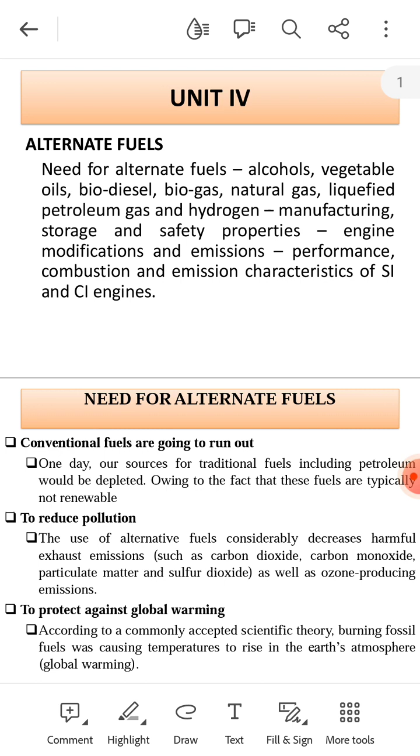To protect against global warming - according to commonly accepted scientific theory, burning fossil fuels causes temperature to rise in the earth's atmosphere, that is global warming.

To save money, alternative fuels can be less expensive to use, not just in terms of the fuel itself but also in terms of longer service life. This in turn means savings for the long term.

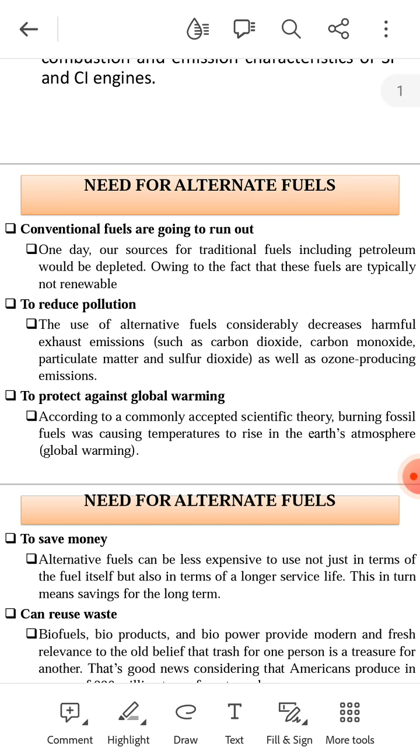Can reuse waste. Biofuels, bioproducts, and biopower provide modern and fresh relevance to the old belief that trash for one person is a treasure for another. That's good news, considering that Americans produce in excess of 236 million tons of waste each year.

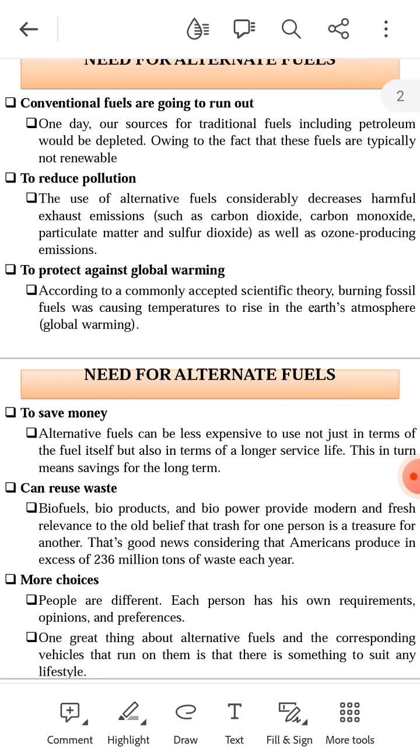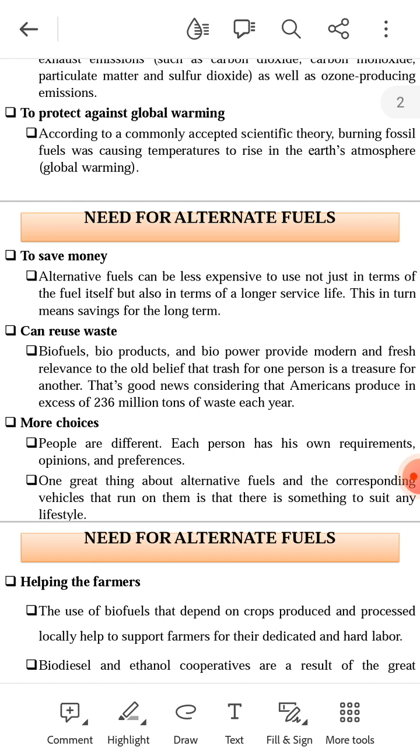More choice. People are different. Each person has his own requirements, opinions, and preferences. One great thing about alternative fuels and the corresponding vehicles that run on them is that there is something to suit any lifestyle.

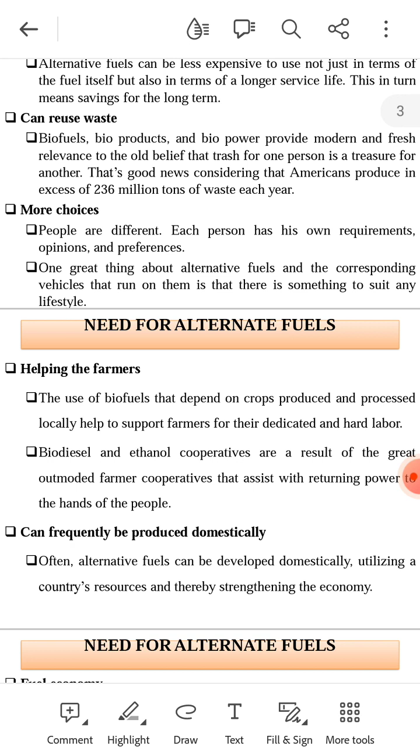Helping the farmers. The use of biofuels that depend on crops produced and processed locally helps to support farmers for their dedicated and hard labor. Biodiesel and ethanol cooperatives are the result of great, outmoded farmer cooperatives that assist with returning power in the hands of the people, and can frequently be produced domestically.

Often, alternative fuels can be developed domestically, utilizing the country's resources and thereby strengthening the economy. Fuel economy - vehicles driven on hydrogen fuel cells and diesel are more economical with respect to fuel compared to equivalent gasoline vehicles, meeting current global energy demand.

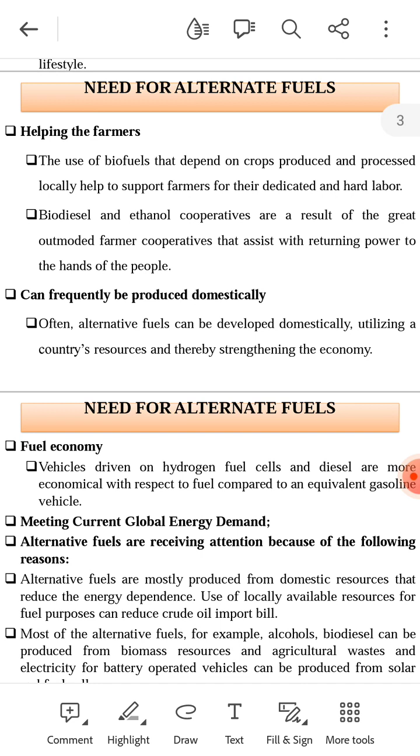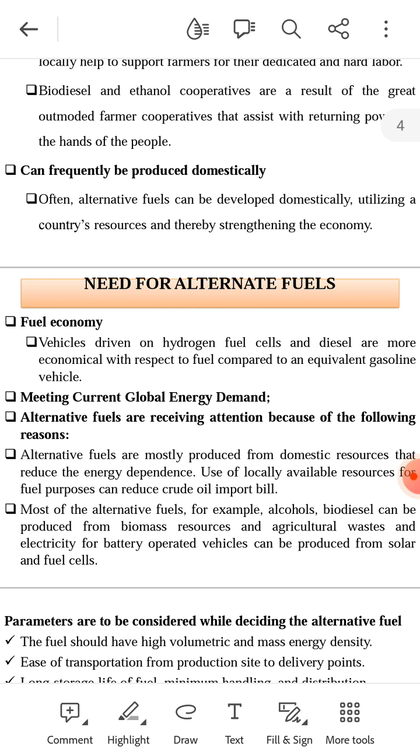Alternative fuels are receiving attention because of the following reasons. Alternative fuels are mostly produced from domestic resources that reduce energy dependence. Use of locally available resources for fuel purposes can reduce crude oil import bills. Most alternative fuels, for example alcohol and biodiesel, can be produced from biomass resources and agricultural waste, and the electricity for battery operated vehicles can be produced from solar and fuel cells.

Parameters to be considered while deciding alternative fuels: the fuel should have high volumetric and mass energy densities, ease of transportation from production site to delivery points, long storage life of the fuel, and minimum handling and distribution problems.

Environmental compatibility - while using alternative fuel, the engine performance is expected to improve significantly with regard to regulated emissions and unregulated emissions. Manufacturer warranty.

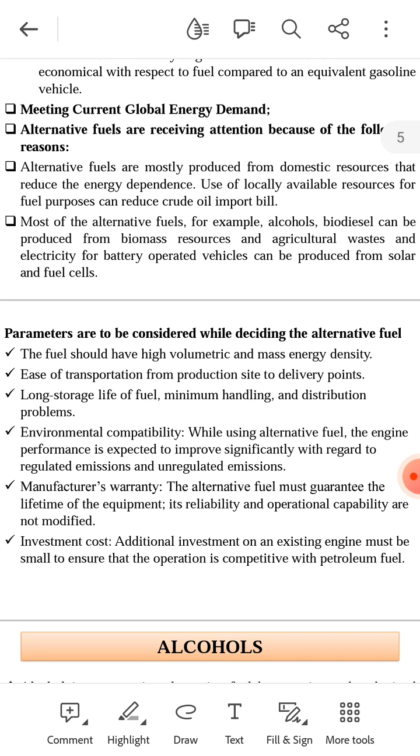The alternative fuel must guarantee the lifetime of the equipment, its reliability and operational capability are not modified. Investment cost - additional investment on an existing engine must be small to ensure that the operation is competitive with petroleum fuels.

Alcohols. Alcohol is an attractive alternative fuel because it can be obtained from a number of sources, both natural and manufactured. There are two kinds of alcohol: methanol and ethanol.

Methanol as an alternative fuel. Methanol is one of the most promising substitutes for petroleum fuels. It can be produced from a wide range of available raw materials like coal, lignite, and municipal solid waste.

Pure methanol and a mixture of methanol and gasoline in various percentages have been extensively tested in several engines and vehicles. The most common mixtures are M85, that is 85% methanol and 15% gasoline, and M10, meaning 10% methanol and 90% gasoline.

Production of methanol from lignite or coal. The pulverized coal is fed into the gasifier where oxygen is supplied and combustion takes place. Synthetic gas, which consists of CO and H2, is produced due to combustion of coal.

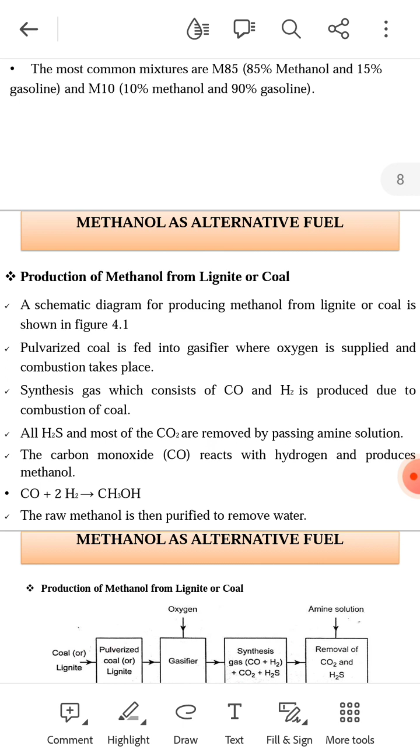All H2S and most of the CO2 are removed by processing with amine solutions. The carbon monoxide reacts with hydrogen and produces methanol. The raw methanol is then purified to remove the water.

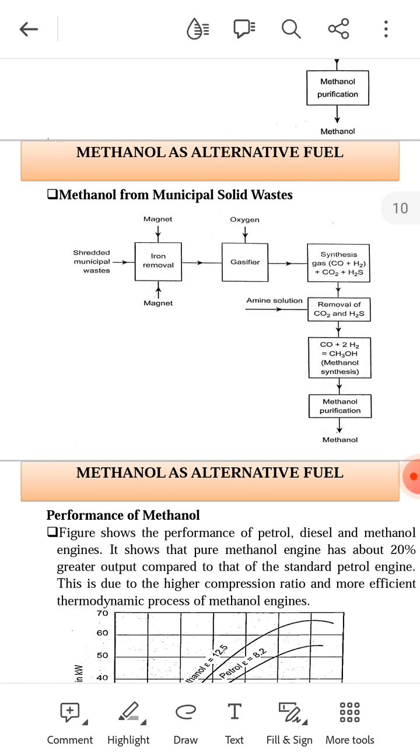Methanol as alternative fuel: performance comparison of petrol, diesel, and methanol engines. Pure methanol gas engines have about 20% greater output compared to standard petrol engines, due to the higher compression ratio and more efficient thermodynamic process of methanol engines.

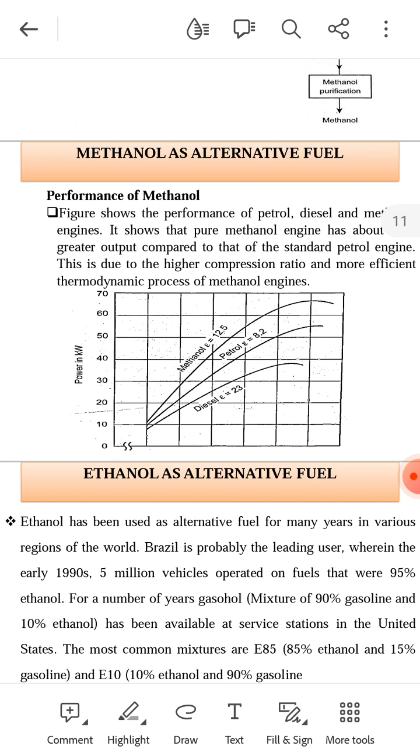Ethanol has been used as an alternative fuel for many years in various regions of the world. Brazil is probably the leading user, where in the early 1990s 5 million vehicles operated on fuels that were 95% ethanol. For a number of years, gasohol has been available at service stations in the United States, the most common mixtures being E85 and E10.

Production of ethanol: ethanol can be produced from sugar or grain. In contrast with methanol production, the process does not require extreme temperature and pressure, hence a very small unit is needed to produce ethanol.

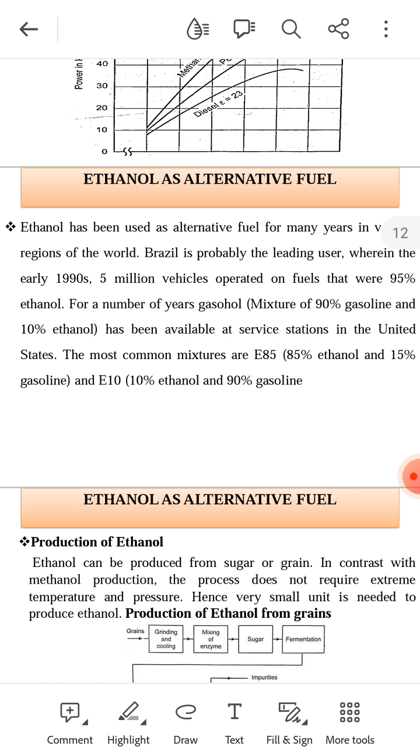Production of ethanol from sugarcane requires a simple process, since the fermentable sugar is obtained directly from the sugarcane. Sugarcane is first cut and ground, and the cane juice is extracted. This sugarcane juice is then fermented with yeast to produce raw ethanol.

Ethanol is produced by fermentation of carbohydrates via the Gay Lussac relation.

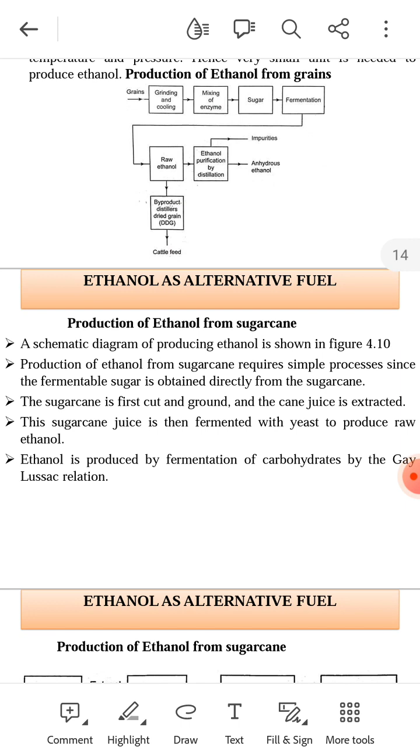Alcohol-gasoline fuel blends: alcohols cannot be used directly as fuel in automobile engines, except methanol in racing cars, but they can be used as a blend with gasoline. Some common alcohol-gasoline fuel blends are E85, E10, M85, and M10. The advantages of alcohols include high thermal efficiency, higher volumetric efficiency, and good internal cooling.

Alcohols can also be blended with gasoline to form gasohol, which is widely used in the USA. The sulfur content in the fuel is low, resulting in less overall emissions compared to gasoline.

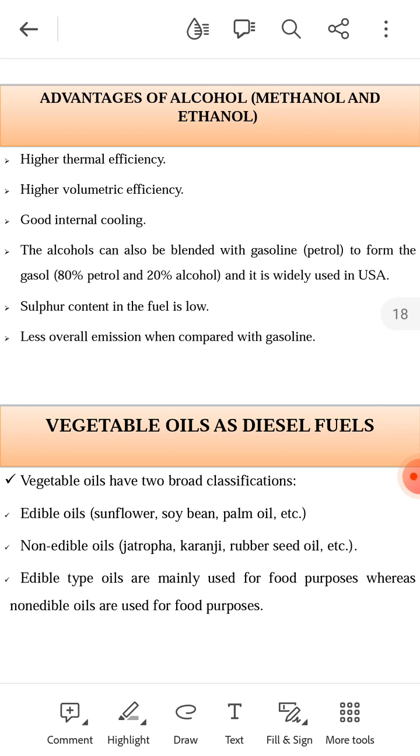Vegetable oils as diesel fuels have two broad classifications: edible oils, such as sunflower, soybean, and palm oil, which are mainly used for food purposes; and non-edible oils, which are used for non-food purposes.

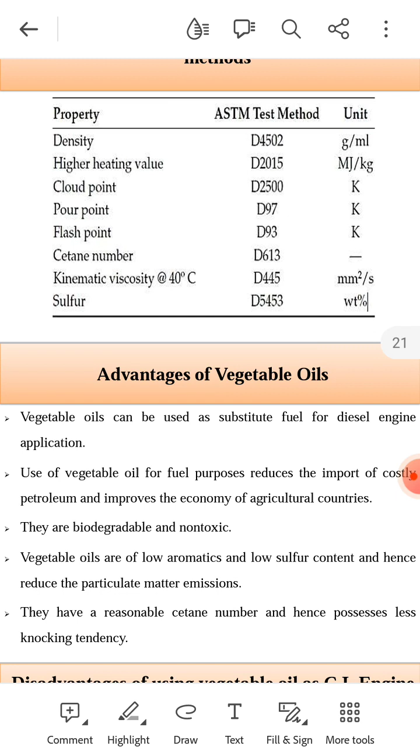Vegetable oils can be used as a substitute fuel for diesel engine applications. Use of vegetable oil for fuel purposes reduces the import of costly petroleum and improves the economy of agricultural countries.

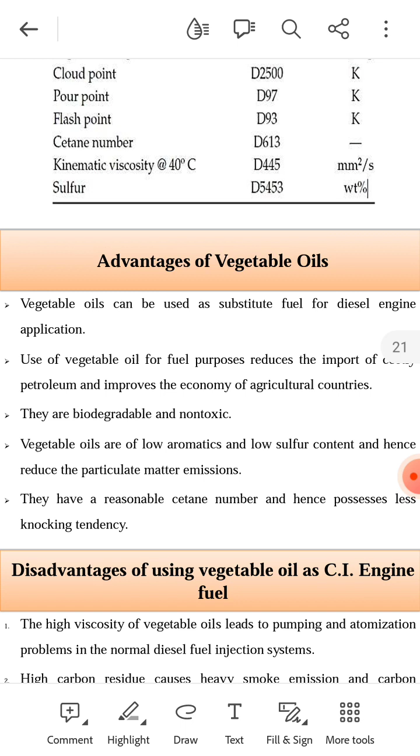Vegetable oils are biodegradable and non-toxic. They have low aromatics and low sulfur content, hence reducing particulate matter emissions. They have a reasonable cetane number and hence possess less knocking tendency.

Disadvantages of vegetable oils in CI engines: the high viscosity of vegetable oils leads to pumping and atomization problems in normal diesel fuel injection systems. High carbon residues cause heavy smoke emission and carbon deposition on injection nozzle tips and in combustion chambers.

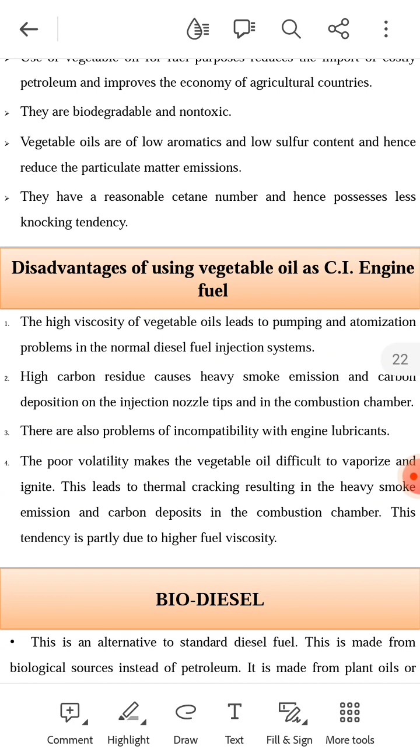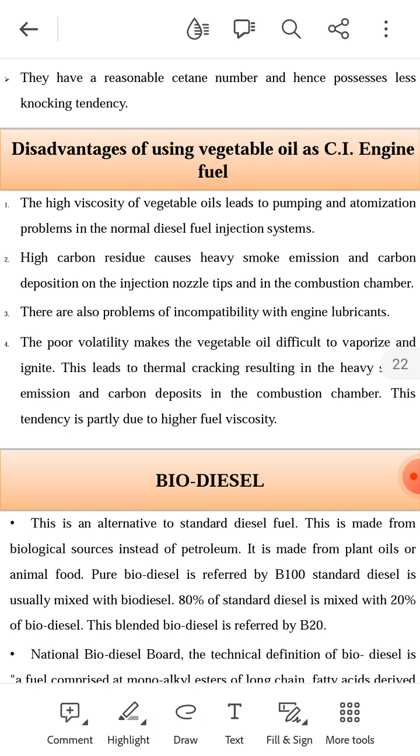There are also problems of incompatibility with engine lubricant. The poor volatility makes vegetable oil difficult to vaporize and ignite. This leads to thermal cracking, resulting in heavy emissions and carbon deposits in the combustion chamber. This tendency is partly due to higher fuel viscosity.

Biodiesel is one of the alternative fuels, made from biological sources instead of petroleum. It is made from plant oil or animal fat. Pure biodiesel is referred to as B100; standard diesel is usually mixed with biodiesel.

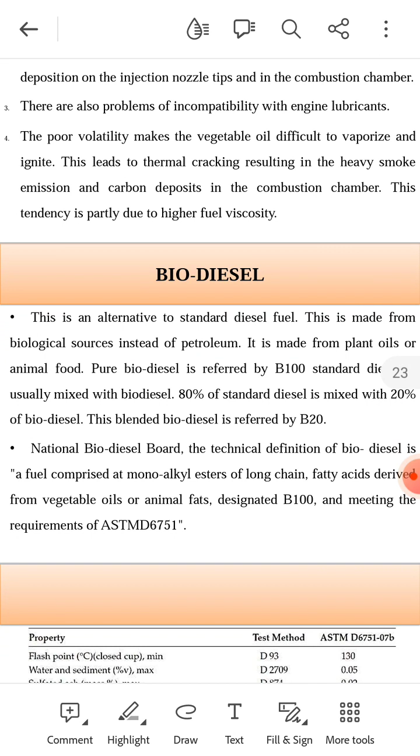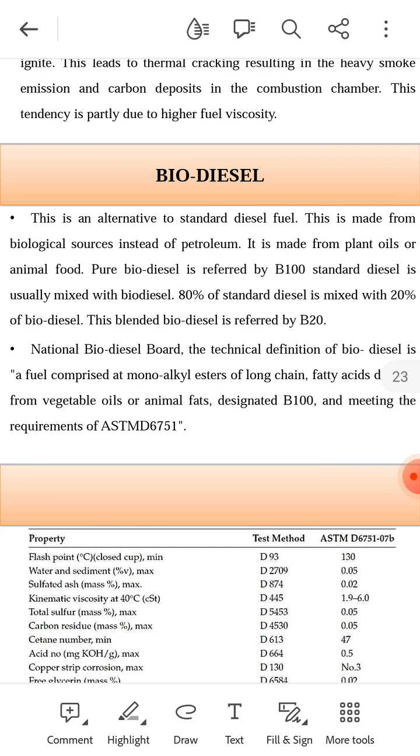80% standard diesel mixed with 20% biodiesel is referred to as B20. According to the National Biodiesel Board, the technical definition of biodiesel is a fuel composed of mono-alkyl esters of long chain fatty acids from vegetable oils or animal fat, designated B100, and meeting the requirements of ASTM D6751.

Biodiesel production: vegetable oil reacts with alcohol in the presence of a catalyst to produce biodiesel. The production process consists of three steps: conversion of triglycerides to diglycerides and one ester molecule, followed by conversion of diglycerides into monoglycerides and one ester molecule, and finally conversion of monoglycerides into glycerol and one ester molecule using a catalyst.

Advantages of biodiesel: it is safe and non-toxic. It has a higher flash point than conventional diesel oil. It can be easily stored and transported. It can also be used as an engine lubrication assistant, and it increases engine life due to less deposit.

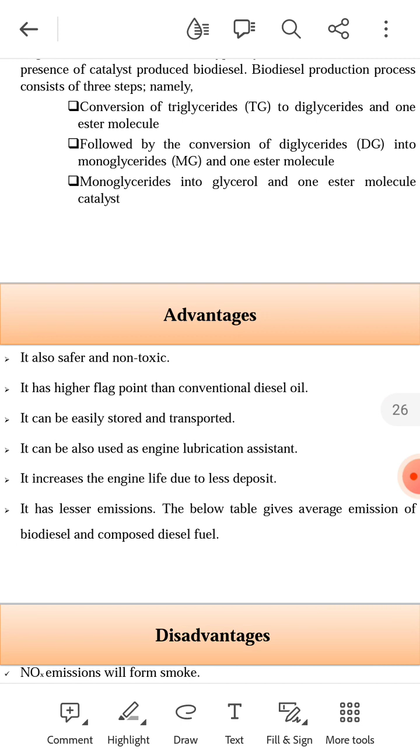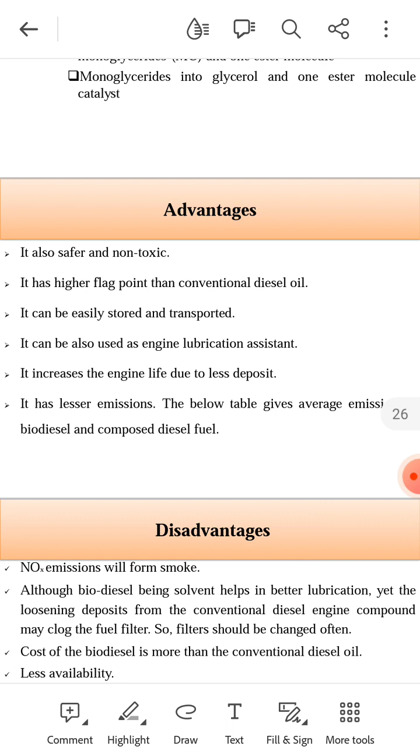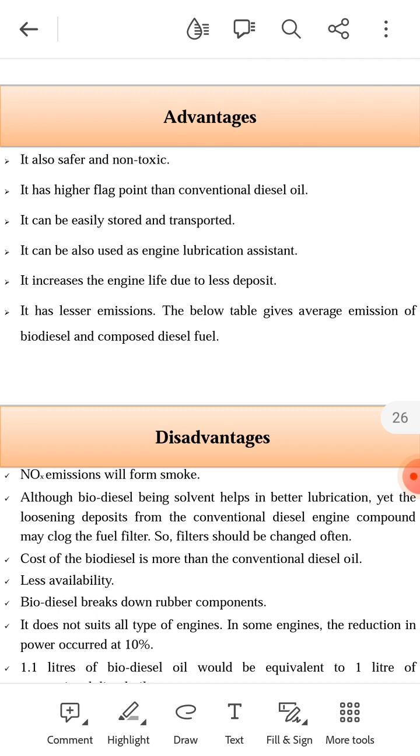Biodiesel, being a solvent, helps in better lubrication, yet it can loosen deposits from conventional diesel engine components, which may clog the fuel filter, so filters should be changed often. The cost of biodiesel is more than conventional diesel oil, and there is less availability. Biodiesel also breaks down rubber components.

It does not suit all types of engines; in some engines, a reduction in power of 10% occurs. 1.1 liters of biodiesel would be equivalent to 1 liter of conventional diesel oil.